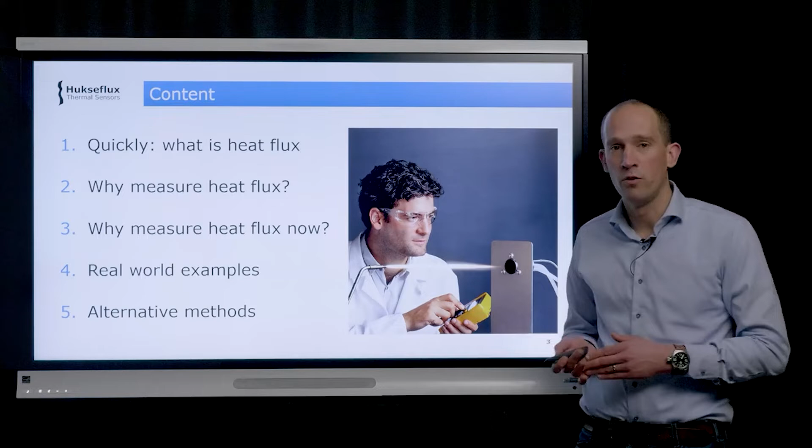At the end of the presentation, we'll quickly discuss some alternative methods you can also apply when considering heat flux. Okay, so back to the beginning.

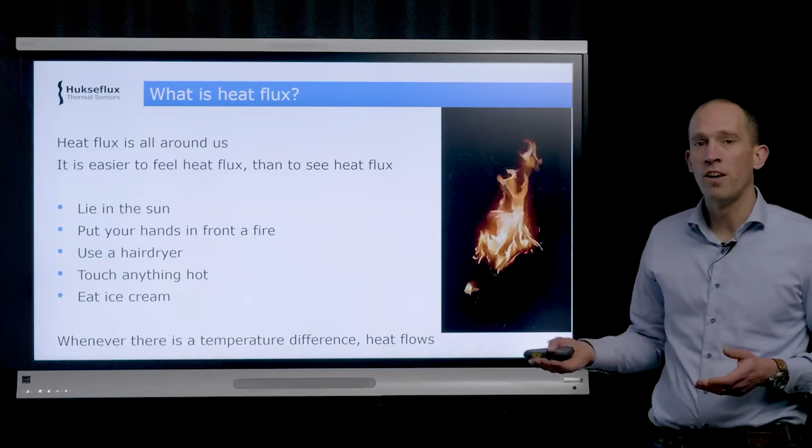What is heat flux? Heat flux is all around us. Whenever there is heat flowing, whenever temperature is changing, there is a heat flux. It's much easier to feel heat flux than to see it. For example, when you lie in the sun, put your hands in front of a fire, use a hairdryer, touch anything hot, or even eat an ice cream, you get a sensation of heat flux. You feel the temperature changing.

When we talk about heat flux, we always consider three variations: heat flux caused by radiation, heat flux caused by convection, the movement of hot or cold air, and heat flux transported by conduction, flowing through materials themselves.

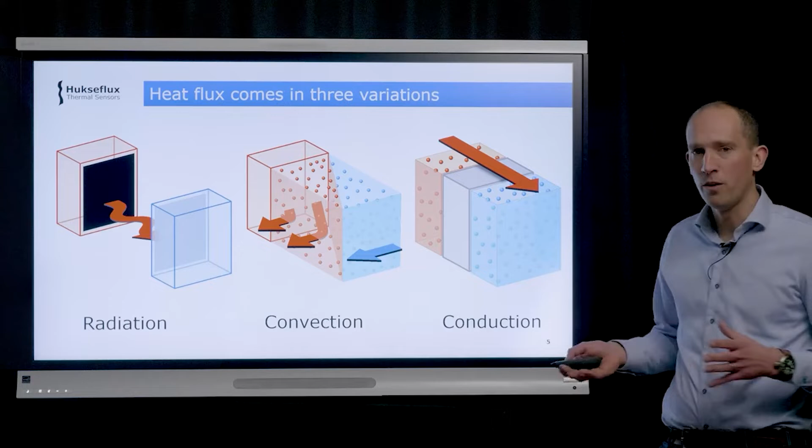I won't go into much detail on these concepts right now, there are other videos available in this presentation. I want to focus on the main question: why heat flux is important and why you should be measuring this quantity.

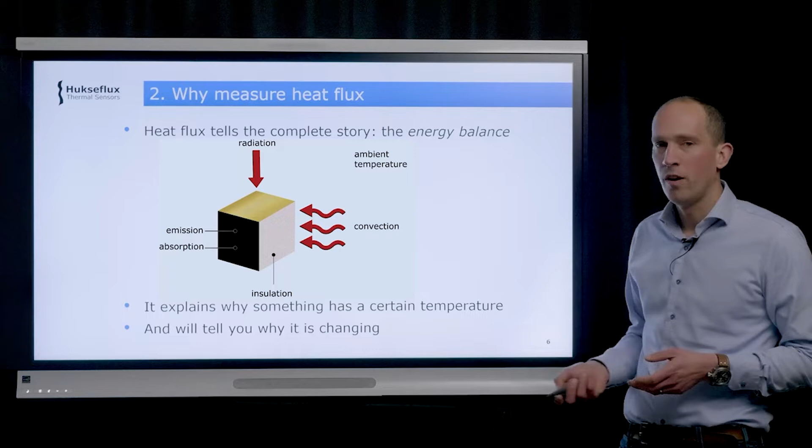There is radiation coming in, convection playing a role, the ambient temperature is important. The material is absorbing, it's emitting, it can be insulated or not. If you want to know what the temperature of this object will be, you should measure the heat flux. If you want to understand why this temperature is changing, you should also measure heat flux. This works basically for everything you can imagine, so heat flux tells a complete story.

This also works for humans. So if you want to answer the question, should you wear a hat? If you walk outside, the sun is radiating on you, you're receiving hot radiation from the sun. There's a certain ambient temperature, and the wind is blowing, which could be a positive or negative effect. If you know all these quantities, all these heat fluxes, you can basically calculate or find out what temperature the human being will be.

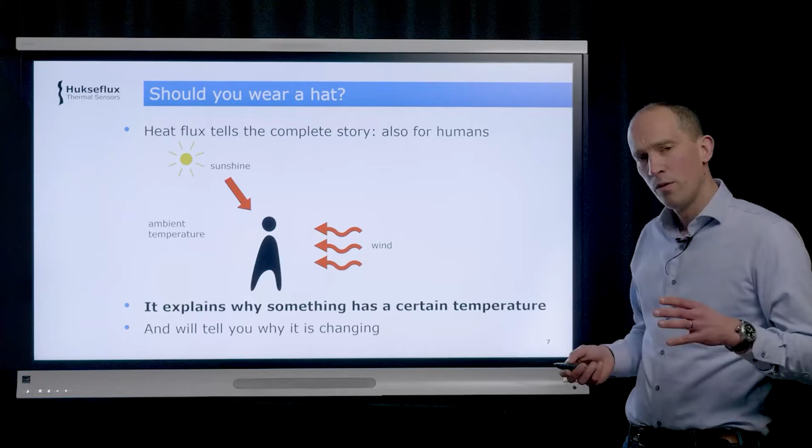Now this not only works on small scales, it works on the largest possible scales. For example, a very fundamental question is: why is our climate changing? If you want to understand why the temperature of something like the Earth is changing, it's the same principle. You should measure the heat fluxes that are affecting the Earth.

So the solar radiation coming in, the energy being absorbed by the surface, being transmitted by clouds, and also the infrared, the long-wave radiation that is emitted. If you go into the literature, you actually see that this is basically the fundamental principle behind the science of climate change: measuring the energy budget of the Earth.

Temperature measurements are very common. What's important to understand is that a heat flux measurement is really an added value to an existing temperature measurement. You can consider this, if you want a metaphor, like how a measurement of electrical current adds to a measurement of voltage.

You could also say that in a situation where you measure just temperature, you're basically just measuring the status, but you're not getting any better understanding. It's like measuring the noise level but not the direction from which the noise is coming.

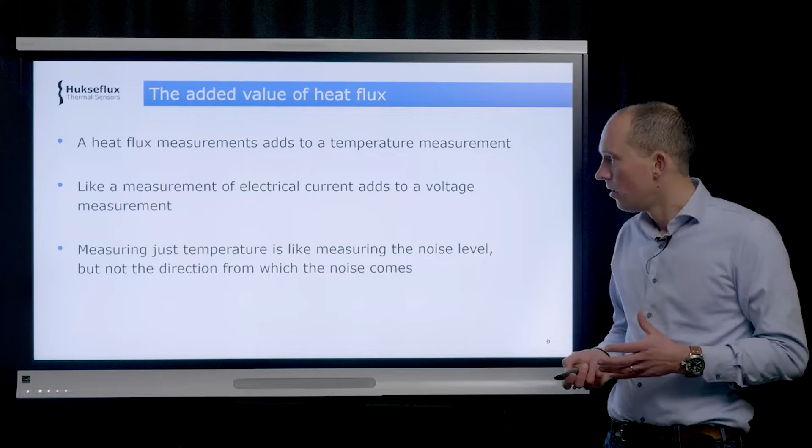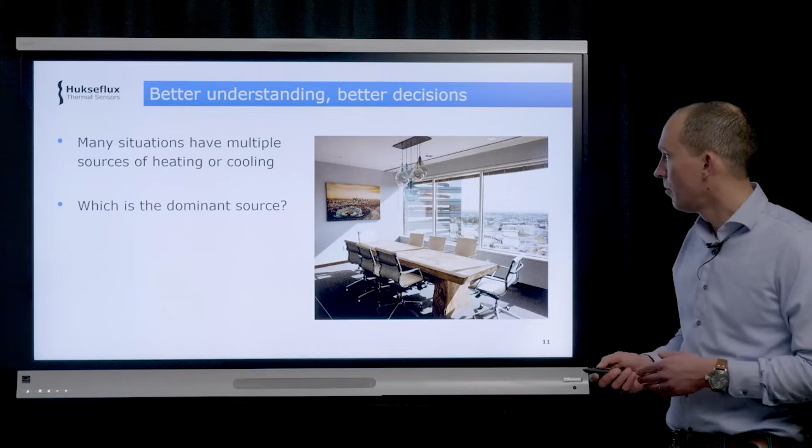So to summarize, the main point is that a measurement of heat flux leads to a better understanding of any thermal situation, which allows you to make better decisions. Many situations in the real world have multiple sources of heating or cooling. For example, if you're looking at an indoor office environment where the sun is shining in and the heaters are turned on, you can actually measure which is the dominant source. Just a temperature measurement will not give you this information.

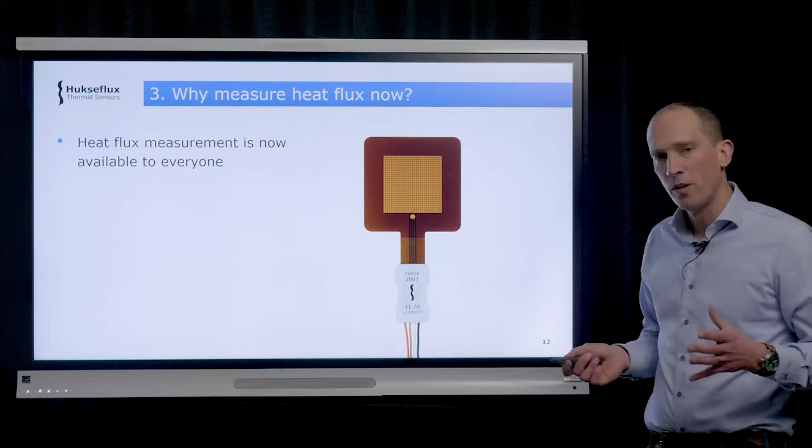So that's basically the main point. Now I want to get back to this main point when we talk about real-world examples later. But right now I want to highlight why you should be measuring heat flux right now. Heat flux measurement is now available to everyone.

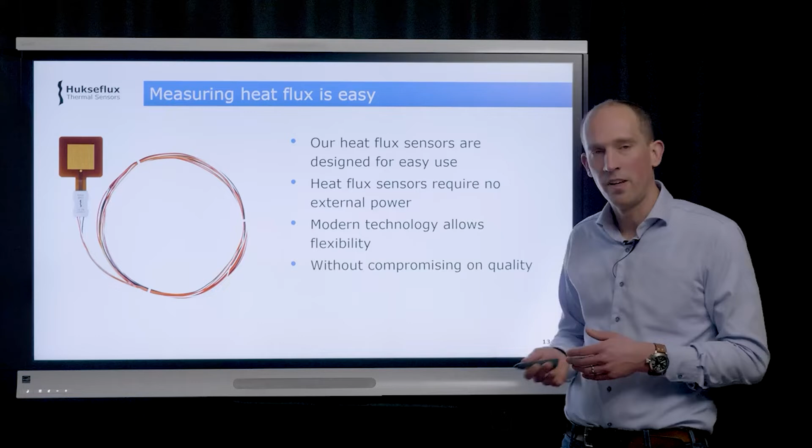Measuring heat flux is very easy. Modern heat flux sensors that are designed over the last few years are very easy to use. They require no external power. They're very flexible, and they do not compromise on quality. So they allow you to get very accurate measurements of heat flux.

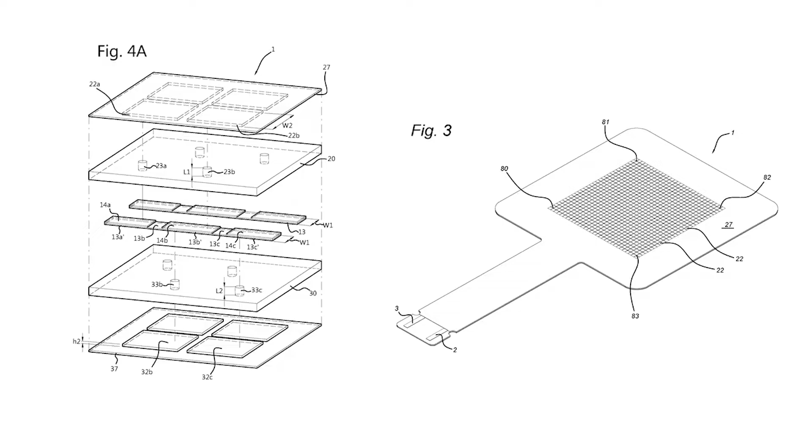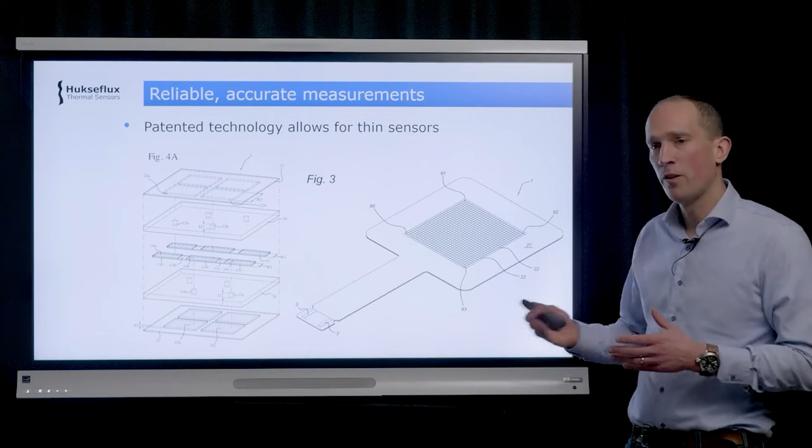It's important to understand that this is really a technological advance over the last few years. Our heat flux sensors are based on a patented technology, allowing for very thin sensors, very reliable and accurate measurements. And at the same time, these instruments are still very much affordable. So that means a heat flux measurement is now more available than ever before.

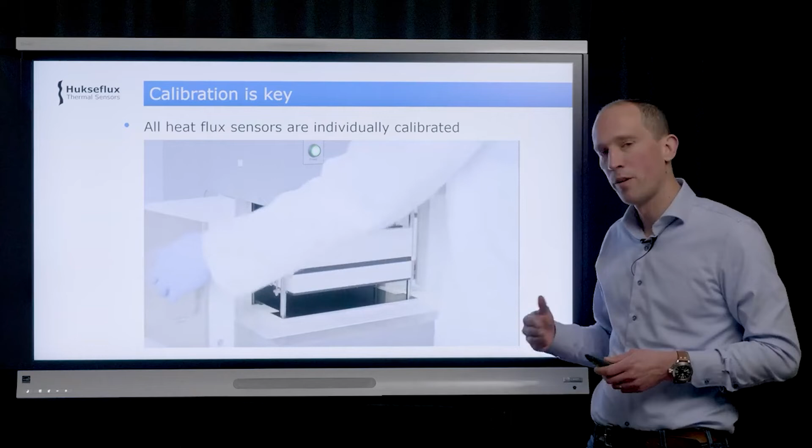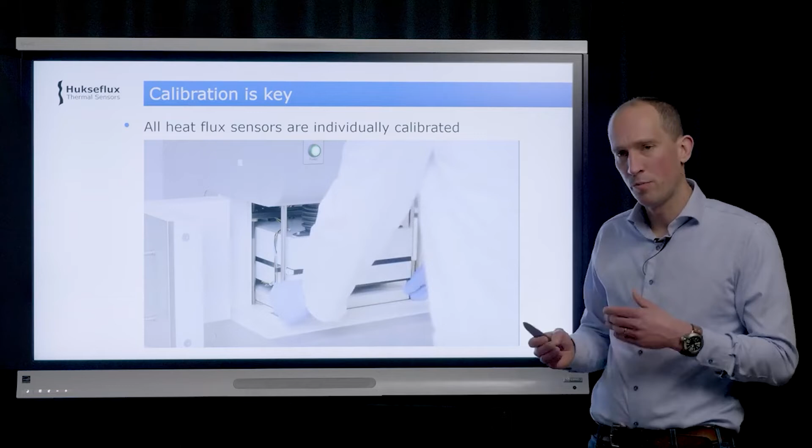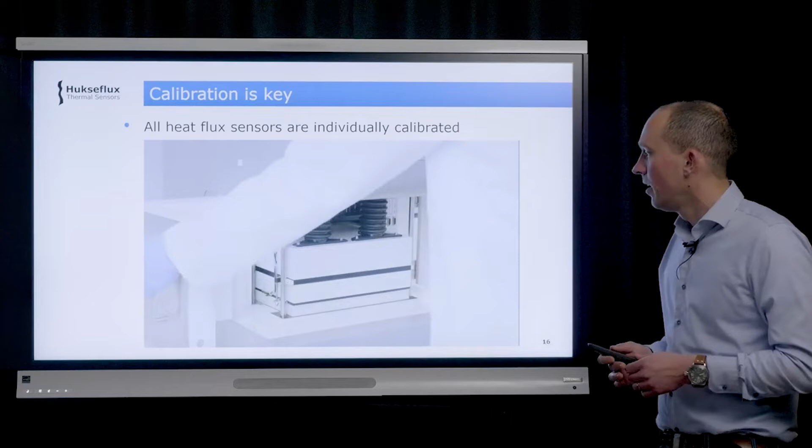A very important point to understand whenever you talk about heat flux sensors is the concept of calibration. By calibrating a heat flux sensor, you're basically determining the output of that individual sensor to heat flux. All our heat flux sensors we manufacture are individually calibrated in a very specifically designed calibration setup. So that means that you always have good traceability and can always rely on performing an accurate measurement of heat flux.

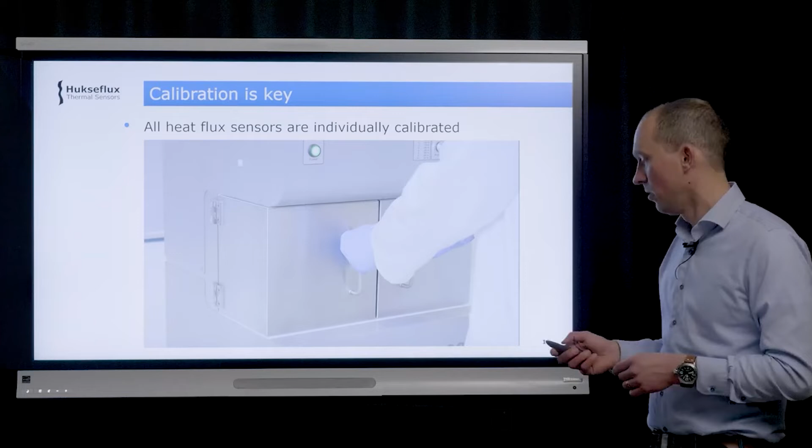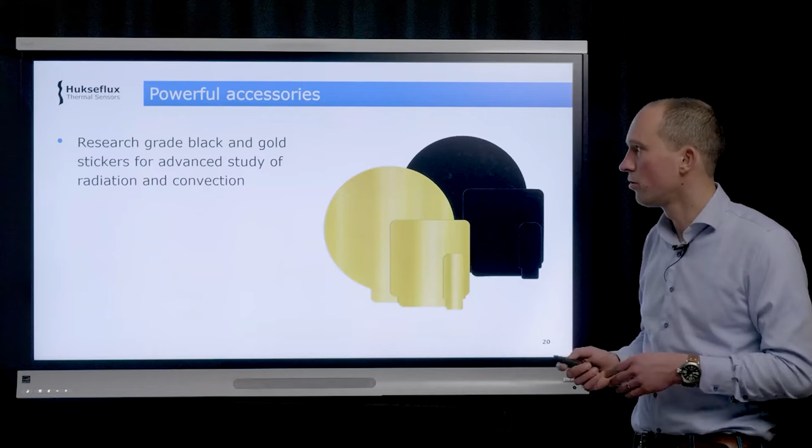For many heat flux sensors, you have the option of using black and gold stickers, which you can apply on your heat flux sensors. By applying a sticker, you're changing the reflectivity of this instrument, and it allows for detailed study of radiation and convection in situations where both of these quantities play a role. So basically, having this ability to separate radiation and convection really can improve your understanding of complicated thermal situations in a way that was not easily available earlier.

When we talk about how heat flux measurement is easy, for example, you can build data loggers, build big measurement systems, but for preliminary testing, there are very easy to use handheld readout units available, which basically give you a very direct number of the energy flux density or heat flux at this specific moment.

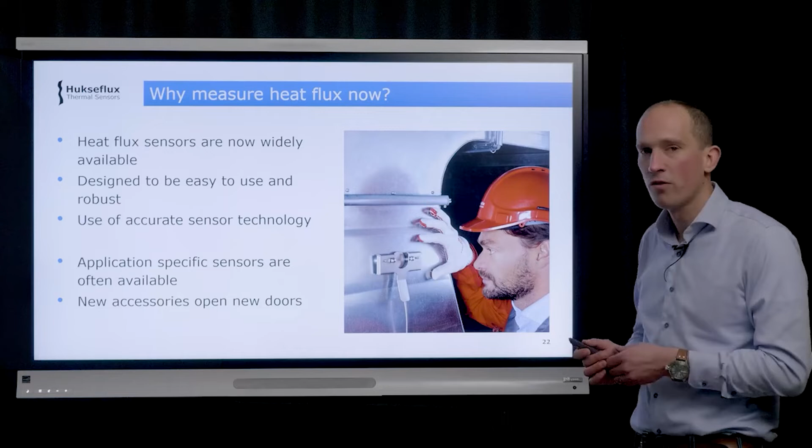So to summarize this point of why you should be measuring heat flux right now: heat flux sensors are now very widely available and designed to be very easy to use, while at the same time being very robust. They rely on very accurate sensor technology. Application-specific sensors are often available, and there is a very wide range of accessories that really open new doors.

To illustrate the value of heat flux measurements, I want to walk through 4 real-world examples. First, we'll look at the most effective way to save energy on heating a house. Then I'll answer why, on a sunny day in spring when the sun sets, it cools down so quickly. I want to talk about terrace heaters and whether they're big enough to heat an entire table. And finally, we'll answer the fundamental question of what is the best way to cool my champagne.

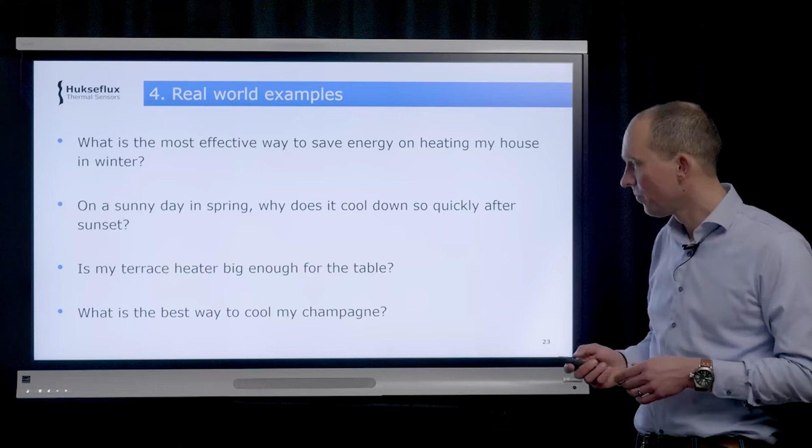So first, let's talk about this house in winter. Let's say you want to heat this house. What is the most effective way to do that? You can start by measuring the different heat fluxes that occur. For example, the heat flux through the doors and windows could lead you to say I need a draft stopper. You can measure the heat flux through your walls, your roof, your floors, your windows. If you measure all these heat fluxes separately, you can find out what is the most efficient solution to save the most energy. Just measuring the temperature inside your house won't give you this information. It's really heat flux that explains what is going on.

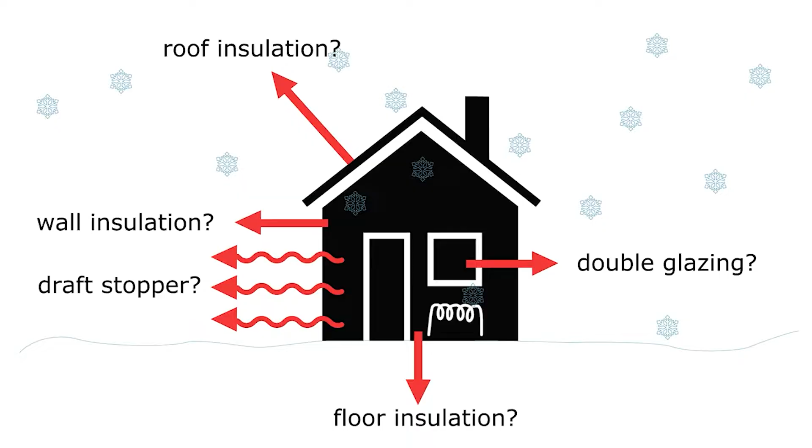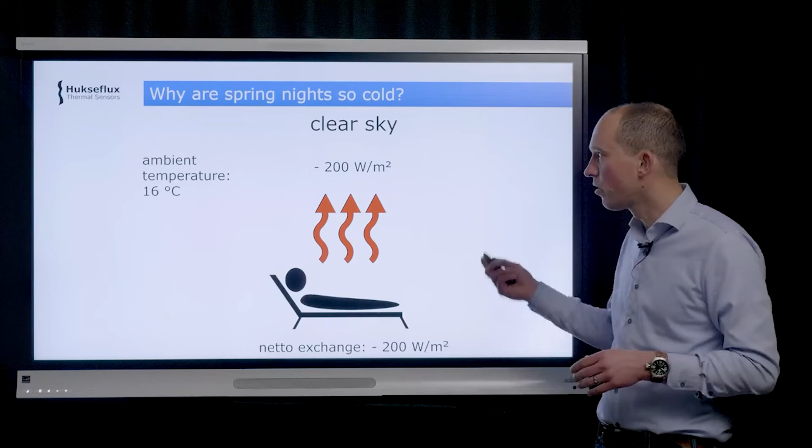Now what happens if the sun drops below the horizon? Immediately, the entire radiative term from the sun is lost. While the ambient temperature hasn't really changed, still 16 degrees outside, all of a sudden your net exchange as a human becomes minus 200 watts per meter squared, and you feel yourself cooling down really quickly. So by understanding what heat fluxes are and how they work, it helps explain this situation.

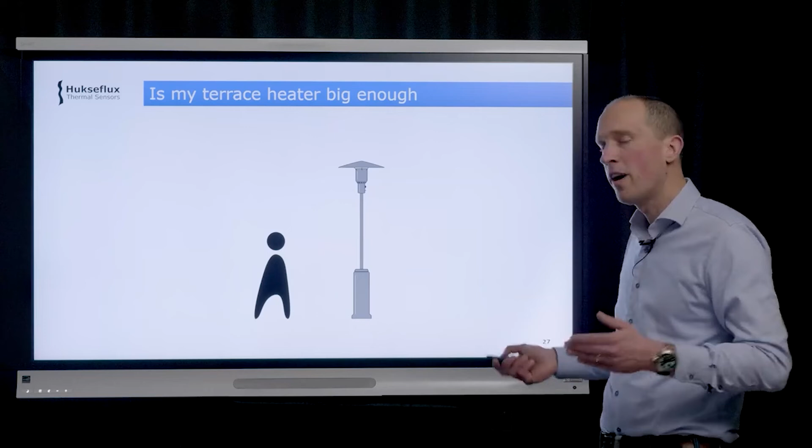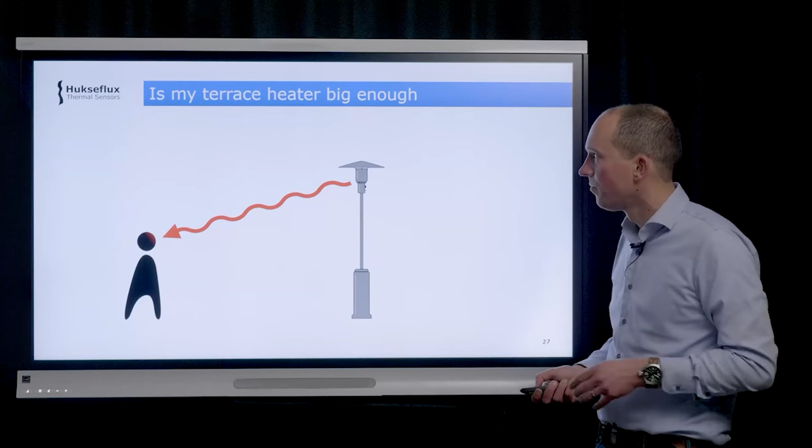So the third point: let's say you want to use terrace heaters. How do terrace heaters work? If you measure terrace heaters, you'll find out they are actually not heating the air, they are radiative sources. So the further you step away from the terrace heater, the heat flux drops. But this is not a linear process. A person very close to the terrace heater experiences about 4 times more radiative heat flux than a person twice as far away. By measuring heat flux, you can actually determine this, because since it's radiative heat flux, it follows the square of the distance.

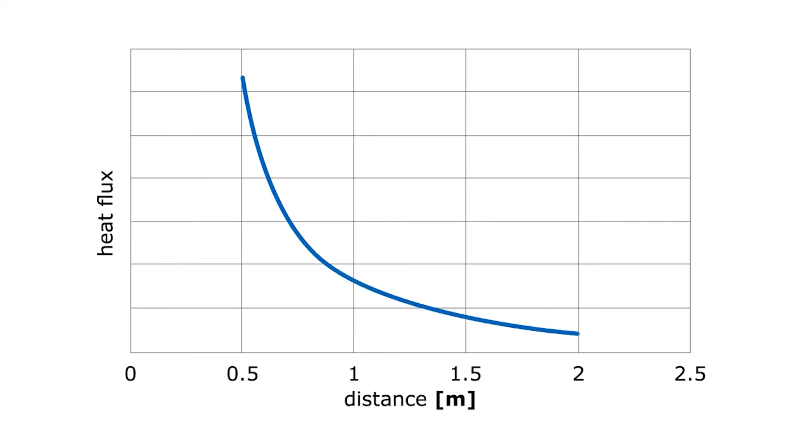So if you only consider temperature measurements, you might say the temperature is very similar across your table. But if you measure radiative heat flux, you'll find out that distance is very important to a terrace heater. So if you have a table with a terrace heater, make sure you're close to the heater and not on the edge of the table.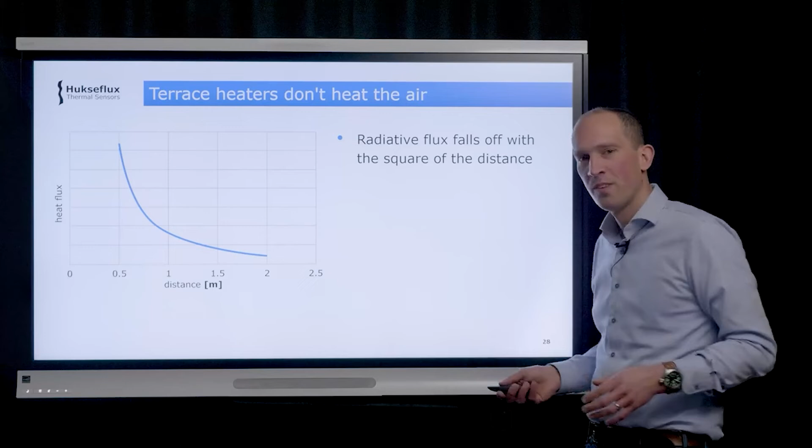So finally, for the most interesting question of these real-world examples: what is the best way to cool my champagne? For this question, I will let my colleague Kees do the talking.

Okay, another example of measuring heat flux: the art of cooling champagne. This bottle is equipped with a flexible heat flux sensor. How do you cool champagne? Possibly by putting it in the fridge. In the fridge we measure a disappointing 75 watts per square meter cooling capacity. This is why they invented the champagne cooler.

Here we measure a 5 times higher heat flux of about 500 watts per square meter. Now, in order to make this work really well, we have a water-filled champagne cooler.

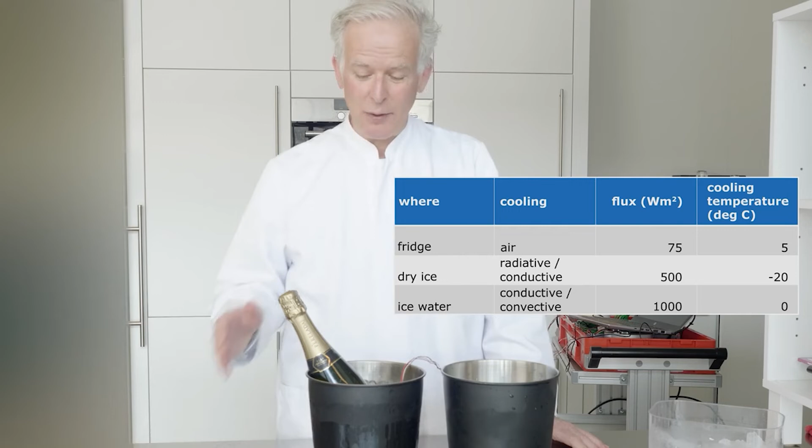And here, from the dry ice to the wet ice, we again win a factor of 2. We measure a staggering 1000 watts per square meter. Well, thank you, Kees, and hopefully these examples illustrate in a real-world situation why measuring heat flux is very important and really helps you to get a better understanding of what you're doing.

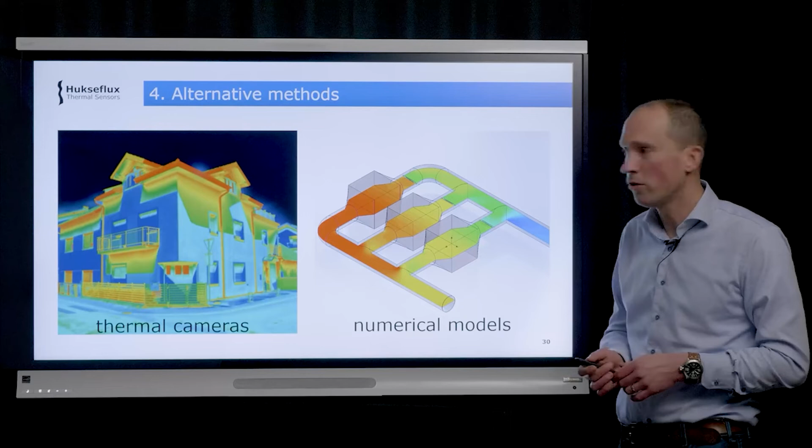At the end of this presentation, I want to quickly note some alternative methods that are also available when we consider heat flux. Basically, there's 2 I want to highlight here. First is the use of thermal cameras for infrared imaging, and secondly, the use of numerical models. So let's talk about thermal cameras.

These are devices which allow you to make a visual picture of the thermal environment. It's important to understand that this is in fact temperature measurement of the complete surroundings, but it's based on emitted radiation. So the camera is measuring how much radiation it is receiving from these components and calculating a temperature. That means it's very reliant on knowing the emissivity of the materials. If you do not know these emissivities, your temperature measurement will be off.

This method is actually very useful for finding hotspots on single materials. Like if you have a piece of metal which is completely uniform, with a thermal camera, you will be able to identify hotspots or cold spots. But whenever you go into a situation where there's different materials or there is reflections from other sources, be very careful when using thermal camera measurements to calculate absolute temperatures or absolute heat fluxes.

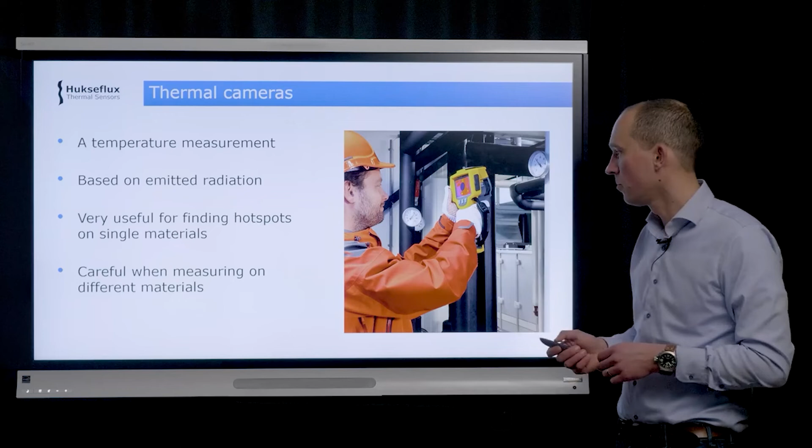To illustrate that a little bit further, I want to talk about this story that we have on this espresso machine. Here on the left-hand side, you see an espresso machine which has 2 heat flux sensors attached on it. These are just general purpose heat flux sensors. And one of them is applied with a black sticker, and one of them is applied with a gold sticker. Now this metal plate on which they are mounted is about 45 degrees Celsius and has a very uniform temperature.

If you look with a thermal camera to this situation, you get this picture on the right. And you see immediately that the black sticker looks like it's hotter than the gold sticker. This is not actually the case. The black sticker is emitting radiation, while the gold sticker does not emit any radiation at all. You can also see on this picture very clearly that both the metal connection blocks and the wires also emit radiation. In essence, this entire picture should be one single temperature.

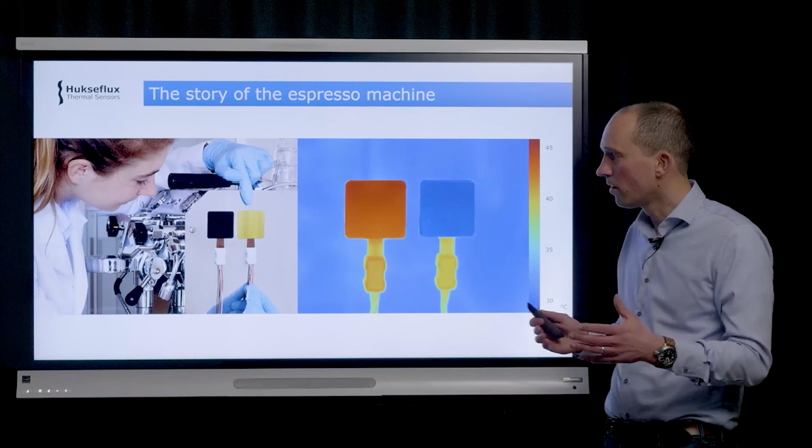A thermal camera image is basically a combination of a temperature measurement and a heat flux measurement together. So to understand what's going on here, you have to understand the heat flux that's playing a role. If you want to measure the heat flux that is actually being emitted by this espresso machine, you should use the heat flux sensor with the gold sticker, because that's the most reliable and most similar situation thermally to the espresso machine itself.

Secondly, numerical models. When people talk about heat flux, they often talk about numerical models, and there's a lot of software available that allows you to put any situation into a 3D modeling software, set some boundary conditions, material properties, and then calculate temperatures and heat fluxes. Those are extremely powerful tools and very useful in a lot of applications. But it's always important to realize that numerical results are based on assumptions.

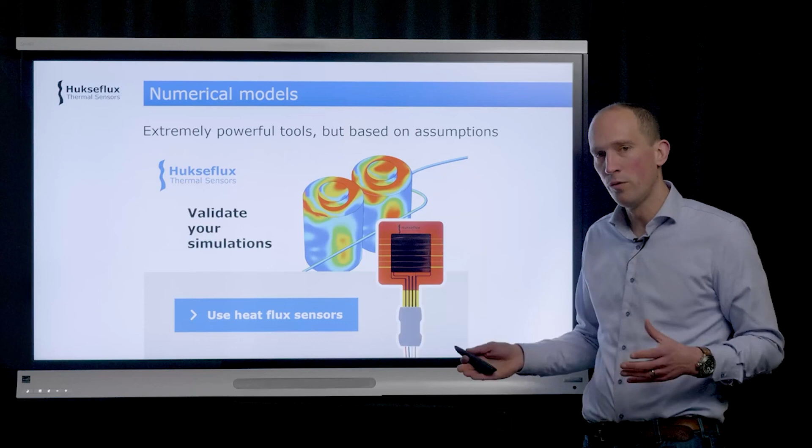So whenever you do a numerical simulation on a real-world situation, make sure to validate the simulations. By using a heat flux measurement, you can actually prove the starting point and the finish point of your simulations.

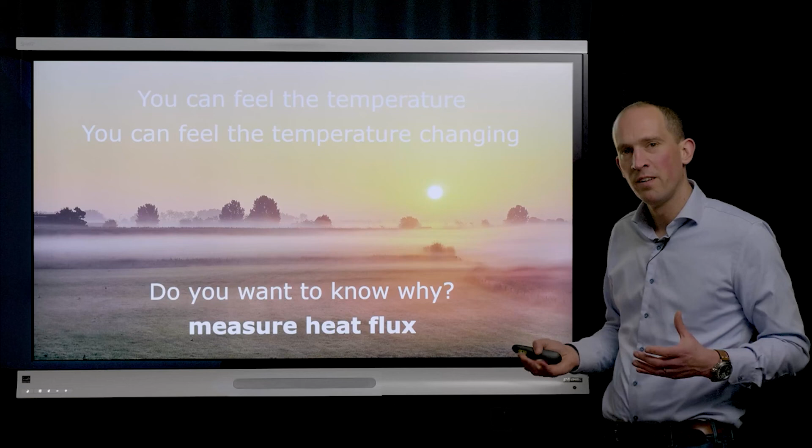So to get this all together, whenever you can feel a temperature, whenever you can feel the temperature changing, and you want to know why, measure heat flux. Heat flux tells the complete story. It will explain why a temperature is changing, and it will give you a better understanding of any thermal situation, leading to better decisions. Next to that, heat flux sensors are now more easily available than ever before. For every budget and for every application, there is a heat flux sensor out there that can help you.